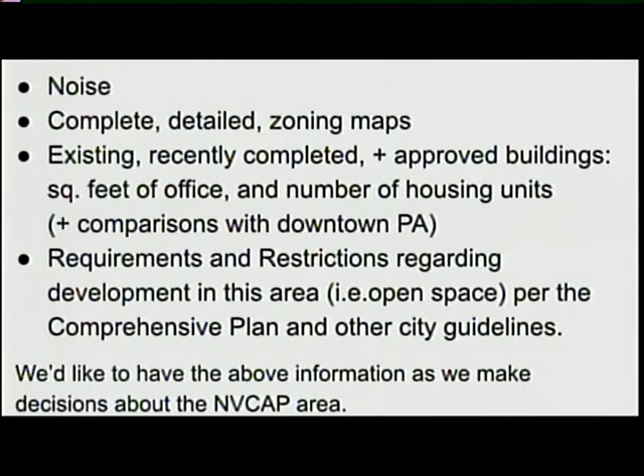So, we would love an existing conditions report with information on hydrology, including the creek, vegetation and wildlife, public and environmental safety, public services and utilities, cultural and historic resources, visual quality and design, geological and seismic hazards, a detailed market feasibility study—this is essential and the public was asking for that—a noise map, complete detailed zoning maps down to the parcel level, existing recently completed and approved buildings and square feet, since it speaks to the permit process of what's already in work, including the number of square feet of office, housing units, retail units, and comparison to density in downtown Palo Alto, plus requirements and restrictions regarding development in this area, such as open space required per the comprehensive plan and other city guidelines. Some of this might be so native to people who do planning all the time that you don't realize we don't know it. So we'd love that information as we start making decisions about the NVCAP area.

We also feel that questions regarding the draft existing conditions report should be addressed at the working group meetings, because that's how everyone can hear the answers. It also makes sense that the draft report should be amended where there are gaps or mistakes, or something needing fuller understanding before designs are made, because it doesn't make sense to design based on flawed, missing, or incomplete information. Several neighbors have asked to see the full existing conditions report, not just a summary, so that should be available to all working group members and the public.

All that information sounds like a lot, and it is a lot, but it was available to the SOFA working group, and we feel we would make better decisions if we had that information.

Communication between the working group members and the staff should be easier and more frequent. Questions should be answered promptly. All relevant information obtained by the city and the consultants should be available to working group members. One example might be that transcripts of the stakeholder meetings would be very informative to the working group members.

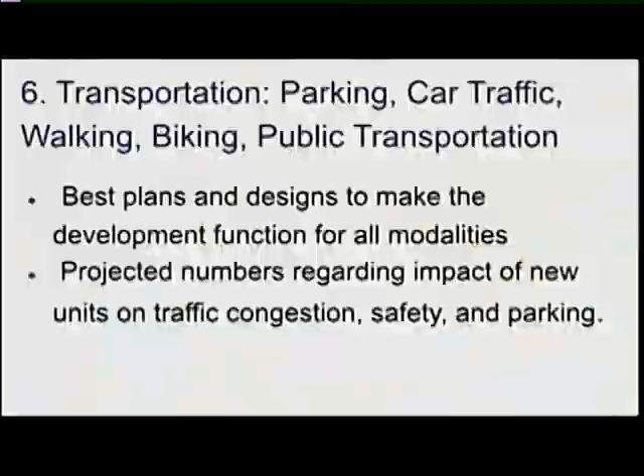This is a subcommittee that would study parking, car traffic, walking, biking, and public transportation, and come up with some nice plans and designs. Again, this would all be to complement the work that you guys already do. We would be doing it in addition to, to help and support what you already do.

From the citizens' side, yeah. We are not experts, we know that. So we're not sure how much enthusiasm there will be, but on the back of the page that I gave you, there's a little proposal too. If you are interested in being on one of the committees, please indicate somehow which one you might be interested in serving on and put your name at the bottom. Because of the Brown Act situation, we'll ask Elena to communicate with people and let them know which people are interested in which committees, if any.

And if you'd like to ask some questions, not that I can answer any more than we've already done, please feel free to talk to us after the meeting. This is for you to fill out if you're interested. Okay? Now we're done. Any questions, though? Comments?

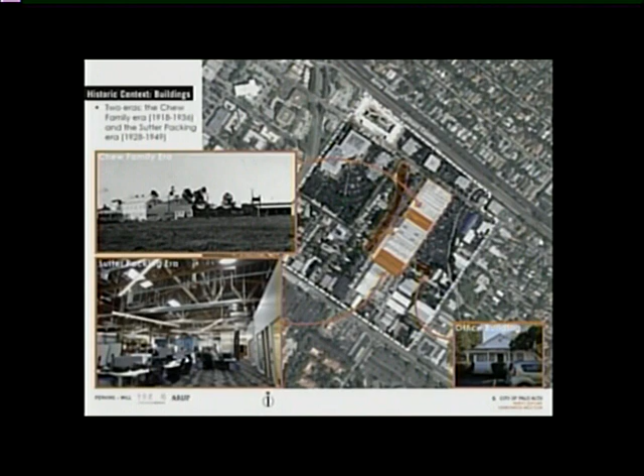In terms of historic context, the plan area was in the town of Mayfield, formed in 1855 and annexed by Palo Alto in 1925. The Fry's building, a complex of different warehouses, was added over time, and currently, one of the most important points of the report, it's not listed on the National Register or the California Register.

However, due to the events that occurred here, it is eligible for listing on the California Register at the local level, related to the canning industry. There aren't many buildings in the area that represent this history, so it could really showcase the canning industry in Santa Clara County and acknowledge the events that occurred here.

No other buildings within the NVCAP boundary are eligible as historic resources, as the report confirms.

So how does this impact our process? The first important thing is that our plan needs to help tell this history and story, and it's up to us to understand our options. There's no specific criteria for what part of the building we retain, or whether we highlight the railway spur, but the idea is to come up with plans that really communicate this historic interest and importance.

Moving on, to speak briefly on the creek: it's under the jurisdiction of the Santa Clara Valley Water District. Inclusive of the creek, there's a 60-foot easement under the water district's jurisdiction. Right now it provides 100-year flood control for the Matadero watershed, and any naturalization or design change would still need to maintain that function.

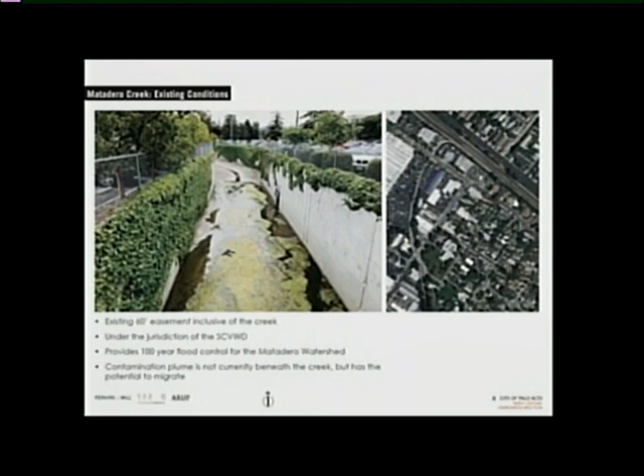As was mentioned, there's a contamination plume beneath the site. Currently it's not beneath the creek, but there's potential for migration of that plume, so we have to be very careful understanding the implications.

I think everyone will be happy to hear this - we are assembling a team of consultants to analyze the feasibility of three scenarios. That team will have a hydrologist, a landscape architect, a biologist, and an environmental engineer to create a thorough study of the feasibility of these options, including a cost analysis and understanding how much land we'd need to acquire to make these options viable.

The first option is naturalization and removal of the concrete channel within the plan area. The second scenario is partial naturalization and partial removal of the concrete channel. The third option is retention of the engineered concrete channel, but with occupiable landscape space adjacent to the channel.

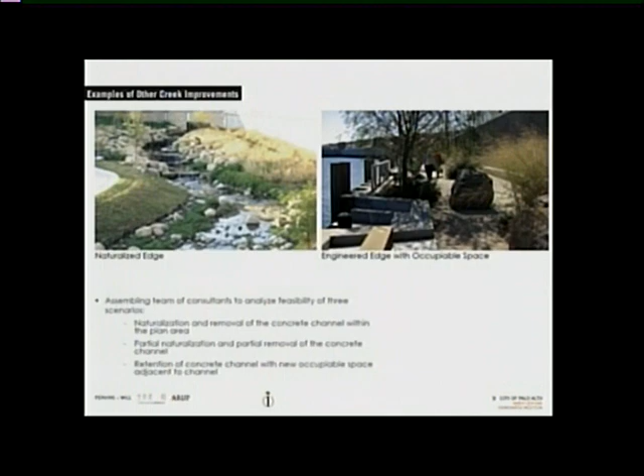Can I offer that you add a fourth - putting a top on it and using the top as public space? Thank you. One more comment - Boulware Park is just down the road, bordering this area. Are we looking just at the portion of the creek on the Fry's property, or will we also look at impacts to Boulware Park?

So we are coordinating with our Public Works Department, and that will be considered.

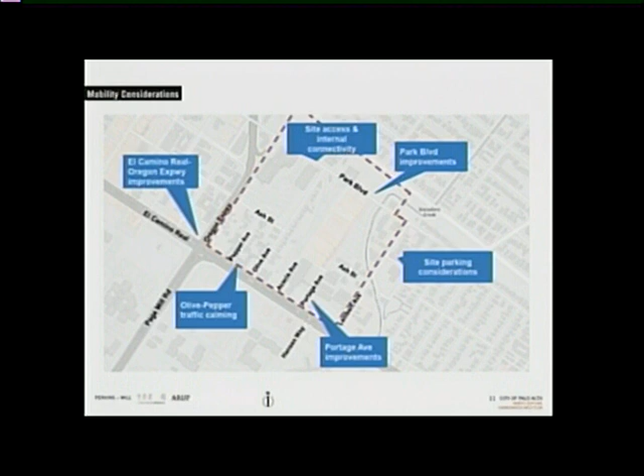We want to talk about site access and internal connectivity, because this is a unique site that's kind of bifurcated currently from a transportation perspective. We want to talk about Park Boulevard, parking, Portage Ave, and traffic calming in the existing Olive and Pepper neighborhood. So those are the areas we're going to cover, and I'm going to try to go really fast.

In terms of El Camino Real and Oregon Expressway, there's a lot of stuff being planned already for this area. The county is looking at adding carpool lanes for Page Mill going westbound towards 280, not on the Oregon Expressway side as far as we know. There's no specific timeline yet, but they are in the works. However, from our analysis, we think the right turn from El Camino onto Oregon Expressway for people trying to get to 101 really backs up in the morning, and that is a factor driving a lot of the cut-through traffic in the neighborhood. So we think it's worth looking at potentially a new right turn lane from El Camino onto Oregon Expressway so people can move through that intersection without being stopped by everyone waiting to go through the light. That's a key piece here.

Along with that, it's important to think about bicycle and pedestrian crossings, because there's a lot of conflicts in this area. People use El Camino Real on bicycles, and crossing these major streets is a big hazard. There's the possibility of a bike-ped crossing at Ash, which some speakers brought up. The reason we factored this in is when we were doing observations for the existing conditions report, we saw people doing this - multiple pedestrians and at least one bicyclist, which was actually kind of terrifying, trying to carry his bike up and over the center divide. So it's a concern because we see people doing it currently, and as we improve connectivity across the site, there could be even more people trying to cross here if they're coming through from the new development on the Fry site. We're concerned this could get worse in the future if nothing is done about it.

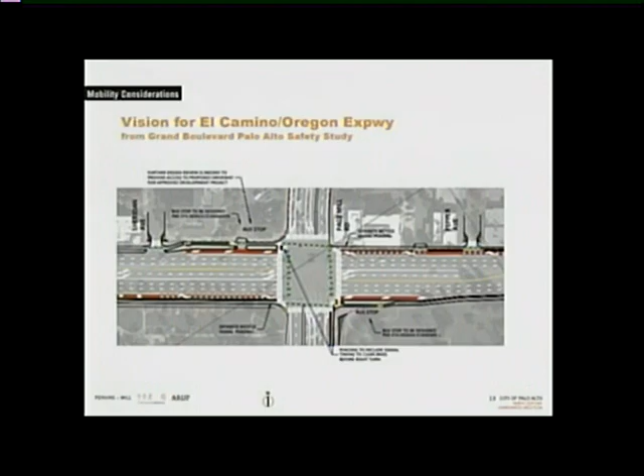Yeah, equals bikes? Yes, in this case, and pedestrian. I know it's a little hard to see, it's pretty small - I blew it up as big as I could. But the green is the areas that would be striped, though there's actually continuous separated bike lanes on both sides of El Camino all across this diagram.

Moving on to Park Boulevard. One of the things we've thought about is improving bicycle and pedestrian travel on Park, which we've heard from you all is really important. We came up with the idea, and later realized the city was also thinking about a two-way cycle track on the north side of Park, the side closest to the railroad tracks, with bikes going both directions and a physical barrier between them and the cars.

The reason we think that makes sense is because there's going to be a lot of left-hand turns. People going left on Park towards California Avenue make left turns to get onto Oregon Expressway, and with new development on the site, people will make left turns to get into the Fry's site. By having it on the north side, bicyclists can move through this area. There are driveways there we'd need to look at since that creates potential conflicts, but we think it will help minimize conflicts for bicyclists passing through as the site builds out. It needs to be studied, but that was an initial idea.

I'm Sylvia, Transportation Manager for the city. I just want to be clear that this graphic is a little bit off because that cycle track is not already planned by the city. It was an idea that was thrown into play, but it's actually not planned. We have no plans to do that, but if you are the body that decides that's what you want.

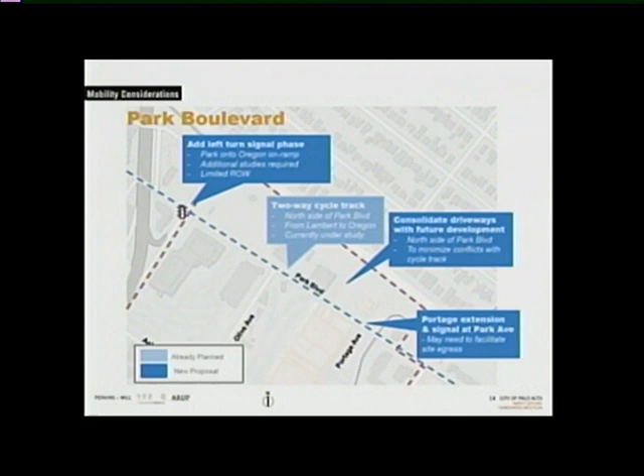Okay, moving on to Portage. Portage is really the primary route at this point in and out of the Fry's site, because it has a signalized intersection at El Camino Real. It's also a really important bicycle and pedestrian route, because Hansen Way on the other side of El Camino is a way a lot of people come, then cross and make that kind of zigzag from Hansen across El Camino onto Portage.

So this is an area that we think needs a lot of study, because with future development there's going to be more cars, and we want to make sure it's safe for bicyclists who are really using that crossing quite a bit. The Palo Alto Bicycle and Pedestrian Plan also calls for a Class 3 bike lane from El Camino to Park on Portage. That's just an existing plan that has not yet been implemented, but something to keep in mind that's been identified as a priority.

There's also a question about Portage, which doesn't actually go all the way to Park right now - it dead ends at the Fry's parking lot. So thinking about whether or not you want to continue that all the way to Park is an important question. That will, of course, have impacts on Park Boulevard if you have cars from the site using Park Boulevard as access.

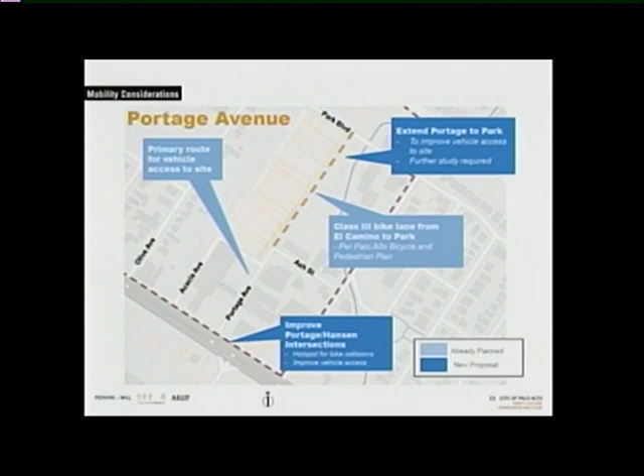Versus keeping it as a dead end and having all the cars just using Portage to get down and out of the site. So this is an area that currently has fairly limited connectivity. And so thinking about where we want cars to be going in the future is a really important question, because there's so few ways in and out of the site.

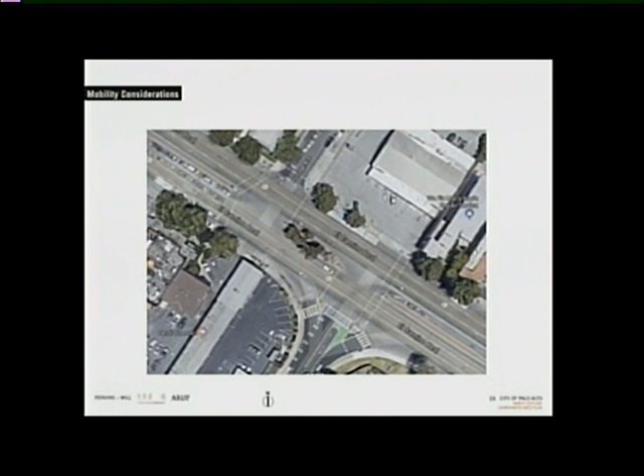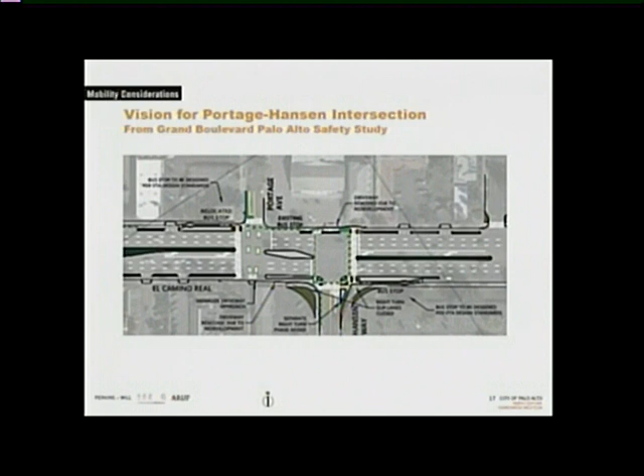So, food for thought. Here's an aerial of the current intersection of Portage, Hansen, and El Camino. It's this kind of weird zigzag currently, and we think there may be ways to improve how this intersection is designed and operated to make it safer. It is a hot spot right now for bicycle collisions, as I mentioned, so making it safer was a priority identified in the Grand Boulevard safety study. This is the design they came up with, which would allow bicyclists to go basically straight across at Portage and then have a protected way to get over to Hansen. So again, something to think about - this is some planning work that's been done that this committee may want to pick up on.

Next up is talking about Olive and Pepper traffic calming. As we talked about, there's a lot of cut-through traffic in the neighborhood. So one suggestion we had was to ban left turns onto Ash from Pepper and Olive, which would prevent people from getting to Oregon Expressway, which is what they're trying to do currently.

There was a question raised in an email and here tonight about what impact that might have on Park - would that encourage more people to go to Park? That's a possibility, but we think it's not likely because it won't be as fast. To get onto Oregon Expressway via Olive, you'd have to make a left on Park and then another left onto Oregon Expressway, and left turns are more congested and difficult. The way people cut through now, they make an easy right turn onto Pepper or Olive and then an easy right turn from Ash onto Oregon Expressway. The left turn on Ash is fast since there's no traffic there. It wouldn't be as fast to make a left onto Park and then another left onto Oregon Expressway - that's our assumption. You folks who live in the area may know better, and if you think that's not true, we want to hear that from you.

Another idea, rather than the left turn ban, if we think that's a potential concern, is to make at least Pepper, and potentially even Olive, one-way towards El Camino. In other words, you wouldn't be able to make a right turn - from Pepper you'd only be able to go towards El Camino. That would obviously have impacts on residents of those streets - you'd all have to drive around more to get to your homes - but it would also be a pretty effective strategy to calm traffic in the area. So again, food for thought.

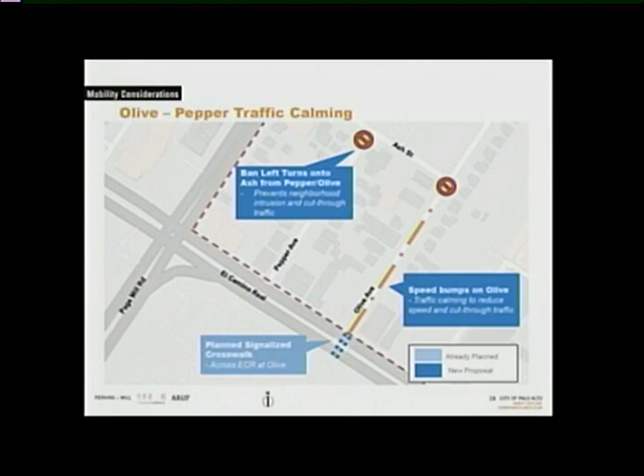I also wanted to note there is a planned signalized crosswalk across El Camino Real at Olive. This is a required mitigation measure for some new development happening on the corner of Olive and El Camino. So that is coming, and as part of that, we want traffic calming so that this becomes a new way for people to get across El Camino on bike or on foot, and we want to make it safe for them. We want to continue the zone of safety with speed bumps on Olive and other traffic calming to make sure Olive is safe for bicyclists and pedestrians once they've crossed El Camino.

Okay, then site access and internal connectivity - as I've alluded to, the site is really divided in two from a transportation perspective because there's a barrier essentially southeast of Olive Avenue. You just can't get through. So we've thought about ways to increase connectivity within the site, like potentially having a connector extending Ash from Olive all the way through to Acacia. That could be a bicycle and pedestrian path, or it could potentially even allow vehicles through as well, which would have pretty big implications for the existing neighborhood. But it's something to think about in terms of connectivity.

If it was just a bicycle and pedestrian path, we think you could do that without even having to demolish homes. You could do it as an easement on somebody's driveway, since there are driveways there that go all the way back to the property line or fence line, turning that into a bicycle and pedestrian path.

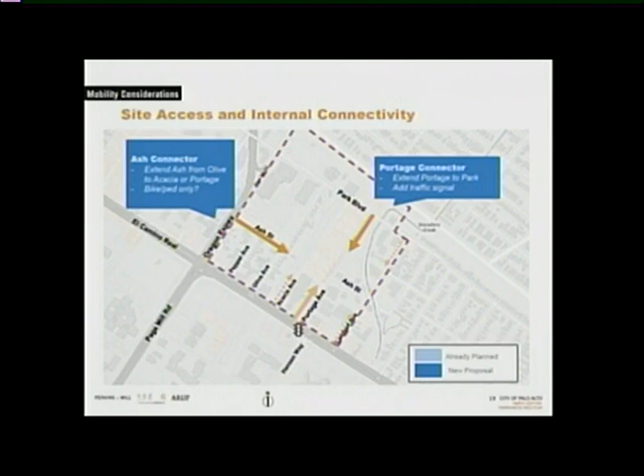Then there's the question of whether it makes sense to extend Portage to Park. I put these on one slide to raise the point that when new development happens, there's a question of where you want the associated traffic to go. Do you want it all coming out to Portage onto El Camino Real, which is already quite congested in the mornings? Do you want it going onto Park, a bicycle and pedestrian priority area? Or would you want it going across onto Ash, onto Oregon Expressway, which would be the most direct way to get cars onto Oregon Expressway, but would mean more cars passing through the existing neighborhood.

These are all trade-offs that the working group will have to think about, because there will be some new traffic generated, and we want to minimize it by making the area as bikeable, walkable, and connected to Caltrain as possible. But there will be some new trips, so where do we want to direct them?

Lastly, parking considerations. Right now parking utilization in the area is extremely low, with plenty of parking both on-street and off based on our counts. But that's clearly going to change in the future with build out of the site, so we want to make sure we're considering impacts created by new development on the existing neighborhood.

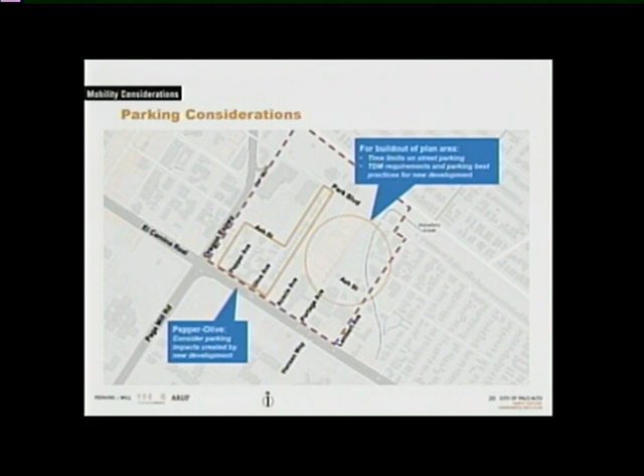For the build out of the plan area, we need to be thoughtful about managing on-street parking so people aren't parking there all day, and making sure we have transportation demand management requirements in place for new development—things like free transit passes for residents and secure bike parking, which can encourage people to drive less or give up their cars. I'd be happy to go into more detail later if there are questions. That's the end of my presentation.

Thank you, Autumn. Lots to chew on there.

The next bit of conversation is about parcel ownership—this is a map we've shown before with more detail. The color corresponds to ownership: the purple area is owned by the same person, the dark blue area is owned by the same person. You can see a pattern of ownership here, which hints at different potential ways things might be developed over time given shared ownership and adjacency.

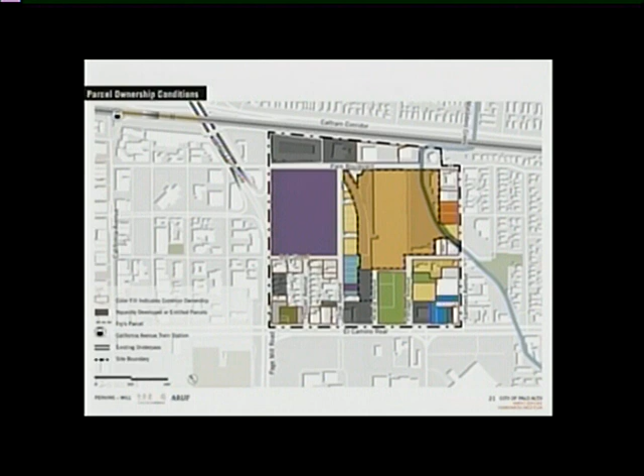This has been simplified on these plans so you can see a dark orange outline—this is our urban design framework. It combines all the elements we've shown onto one map, which is the map that will be on your table to work with. The dark orange outline is the common ownership, the blue intersections are the external intersections Autumn identified, and we're showing potential north-south connections, potential east-west connections, and dashed outlines for potential green areas—all to remind you of the places we've talked about during this framework while you do the exercise.

I was confused about one portion—the orange rectangle that is in the Cloudera parcel. Yeah, so we added that.

It's currently a parking lot. We were a little bold here and said, what if that parking lot could be something else? So it's just kind of out there as an opportunity. There's nothing on there right now except for surface parking.

Just to be clear, the dotted arrows are suggestions of connectivity. We're not saying this would have to be the geometry they would take. That's highlighted in orange, it's a little faint, but there's that easement that Autumn talked about. So there is the capacity to have a north-south connection through Ash where you wouldn't remove any houses. This is really just a suggestion of connectivity. Does that make sense? We can talk about that in our breakout groups more.

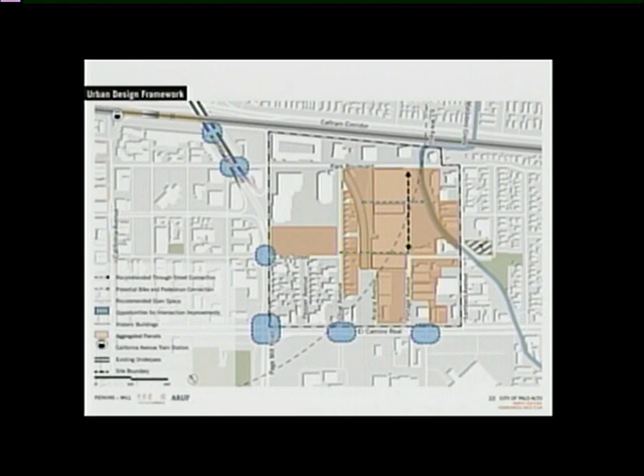Can you offer a clarification for the outline of the proposed open space? It's indicated here, so it's going to guide us, maybe misguide us. It's sort of just a suggestion, this idea kind of linking to potential historic traces of the rail line. If it's not something that anybody feels is an interesting connection, maybe it doesn't connect to anywhere or from anywhere, it's just kind of a location. We're tracing for you outlines of things we've talked about during this meeting so you can remember geographically where they are, and again thinking of them as opportunities, and then there's also constraints. So we're not saying that's where the open space has to go.

I'd like to move on, if that's okay, because I want to get through the building typologies, and any questions you guys have about this we can ask at the tables.

We're going to give you cards with different building typologies on them, and I just want to orient you a little bit to what these are. The first possible building type is a townhome, and that's what's currently permitted on the site. It's about 30 dwelling units per acre, so you can imagine any of the townhome developments you've seen around, very similar density, 35 feet in height.

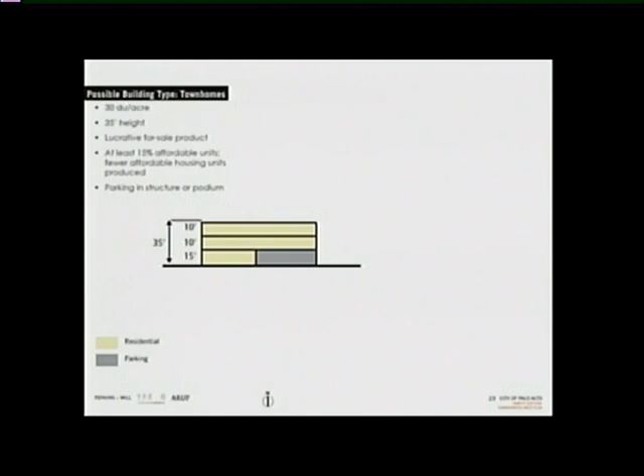This is a very lucrative for-sale product. Typically people are purchasing these as homes, and they tend to have parking in the unit, so you've probably seen these where there's a parking spot underneath the townhome, all kind of associated. If you can imagine in your mind what that looks like, we've also provided some images here of what some other townhome developments look like. These are two images, there are a million different types you could probably imagine, but just to give you a feel and flavor of what that looks like.

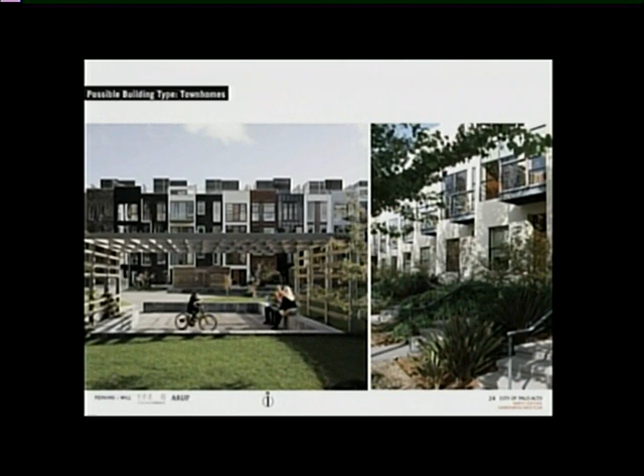Another possible building type is multifamily residential or mixed use, also called type 5 in construction and architecture parlance. This is around 85 dwelling units per acre, so a little over twice as dense, almost three times as dense as townhomes, so a lot more units. This can range anywhere between 45 feet and 65 feet, the construction type is kind of within that range.

There's an option to include ground floor retail in this typology, whereas with townhomes you don't tend to see street-facing retail. As with any project, there'd be a requirement for at least 15% of the homes here to be affordable. Parking is typically below grade or in the podium, so it's kind of wrapped, you don't experience parking on the street, but it's a large parking garage that you drive into.

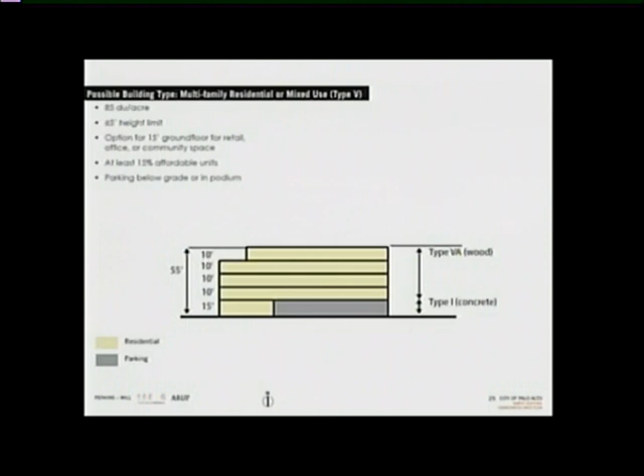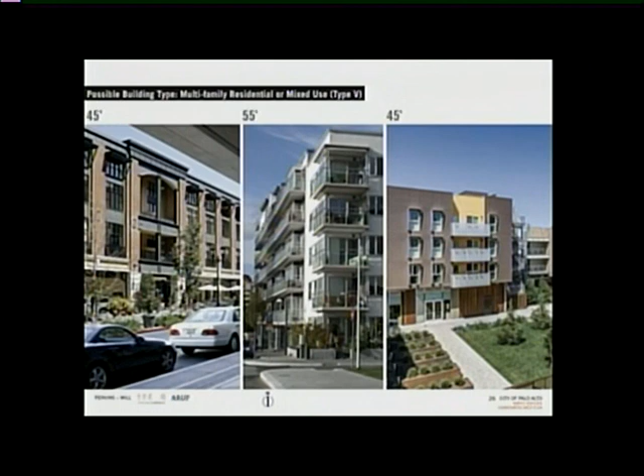And then the third building typology is called type 3, also multifamily residential. This one tends to be rental, so you don't tend to see a lot of for-sale product. That makes it much more affordable to a broader range of people because you don't have to pay a down payment in order to rent a unit.

This is an 85-foot height limit. It ranges, but you tend to see these more in the 75-foot height limit range. Again, you have an option for ground floor retail in this type of space, at least 15% affordable, and you get the parking in the podium or below grade, a consolidated parking situation.

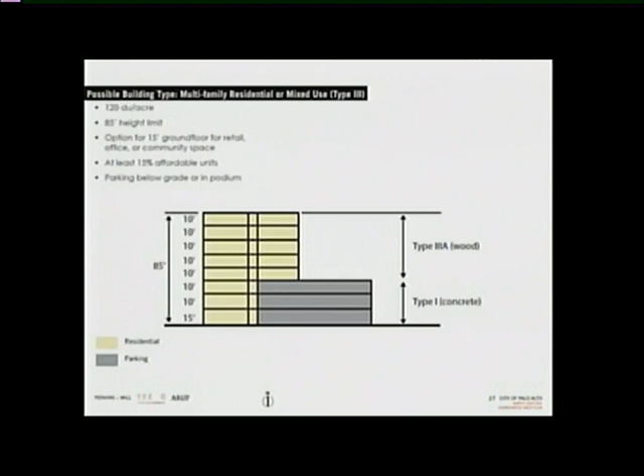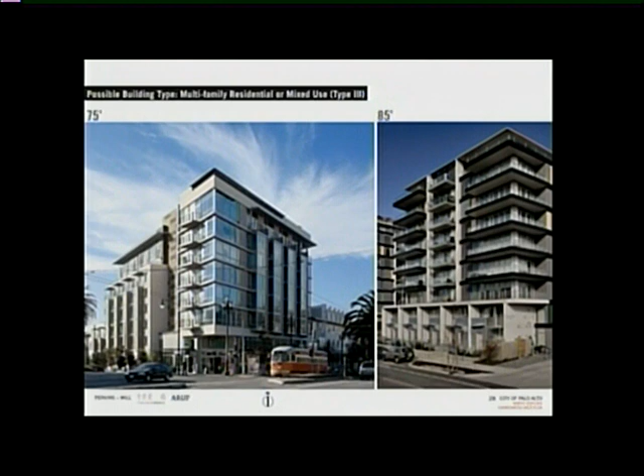So this is what that looks like. This is an example on the left with a Whole Foods on the ground floor, and on the right you can see townhomes on the ground floor, with a big setback, and then the units above with generous balconies.

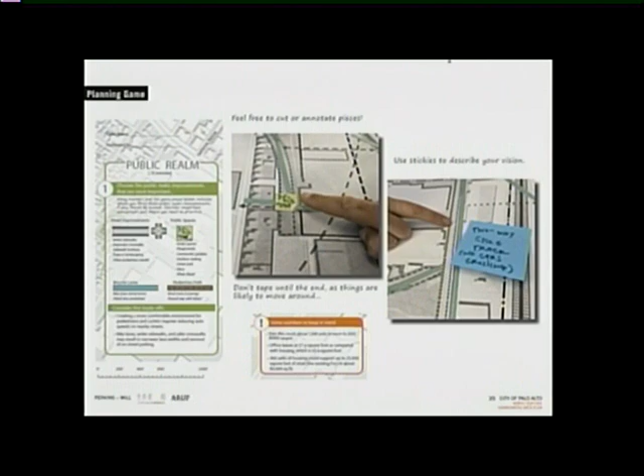So the idea, starting at number 1, is to go through and prioritize your main public realm improvements. I'm going to go through quickly, but then we're going to break out and the facilitators will be able to help.

So there are street improvements, intersection improvements, the idea for public open space that could be paved or have green space, and bicycle infrastructure improvements. Again, this looks like a two-way cycle track, but it can be anything, so feel free to write on it what you're thinking. And then some kind of pedestrian path, if you want to limit an area to just being available to pedestrians.